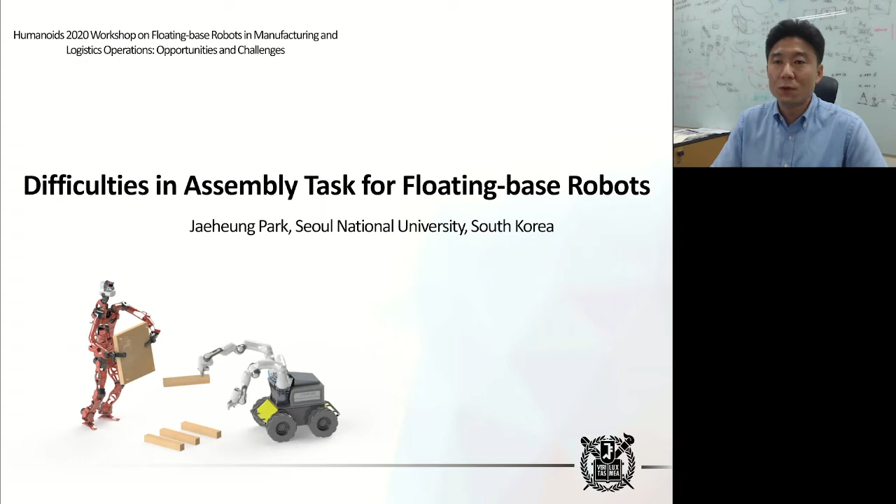So in fact, I don't have direct experience on using these floating-based robots for assembly tasks. However, our group had a very recent project, and in that project we used 3 fixed-based manipulators for assembling a chair. So through the experience of that, I think we can see what would be the difficulties if we do the same thing using a floating-based robot. So I would like to share the experience of our project.

So this is the overview of the project. We are supposed to assemble a chair starting from the instruction in figures. So we have to recognize the instructions in figures and find out the relationships between parts and assembly instructions. And these tasks were conducted by another university, GIST in Korea. And these instructions were given to the robot, and robots are supposed to assemble a chair using these instructions. And this task was conducted by our university, Seoul National University, our group.

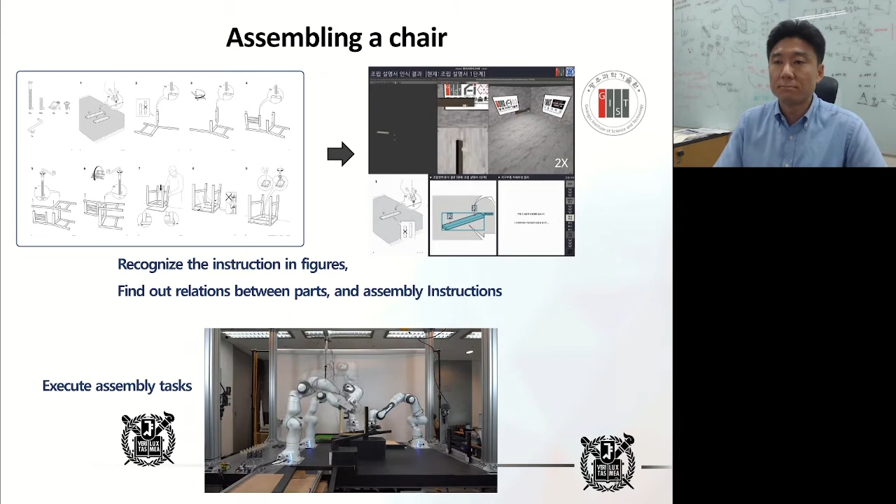And in that project, there were actually 4 consortiums. And I want to introduce some hardware differences among the 4 consortiums because it was quite interesting to see the differences. So the first consortium was Korea University and Surromind, and they decided to use 2 large robots. Those are UR10, and 2 UR10 robots were large enough to manipulate and assemble all the parts. So personally, I think that this is the most efficient way to do that, using a large robot, basically.

Another consortium, Hanyang University and Kitech, decided to use 2 medium-sized robots, UR5. However, those 2 robots were not large enough to manipulate and assemble all the parts. So in the end, they decided to use a moving table and tray so that they can move furniture parts or tools to be used for assembly.

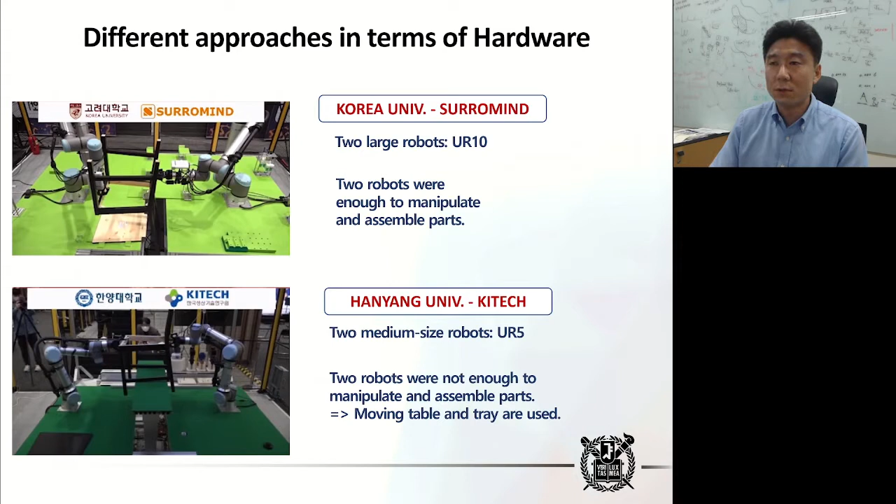Another consortium was Kitech and KETI. These 2 are research institutes in Korea. They decided to use 3 medium-sized robots, RB5, from Rainbow Company. And these robots are actually similar size to UR5. So even if they used 3 robots, they were not enough to manipulate and assemble the parts.

So they designed high degree of freedom robotic hands and a moving table. And all together, they successfully finished the task, assembling a chair. And in fact, they were the fastest among all the consortiums. So I think that using these nice high degree of freedom robotic hands and moving table was a very nice strategy to do that.

Finally, our consortium, Seoul National University and GIST, decided to use 3 medium-sized robots, Franka Panda. The size of these robots was similar to RB5 or UR5. So these robots were not large enough to manipulate and assemble all the parts. The reason that we chose Franka Panda was to utilize the torque control capability.

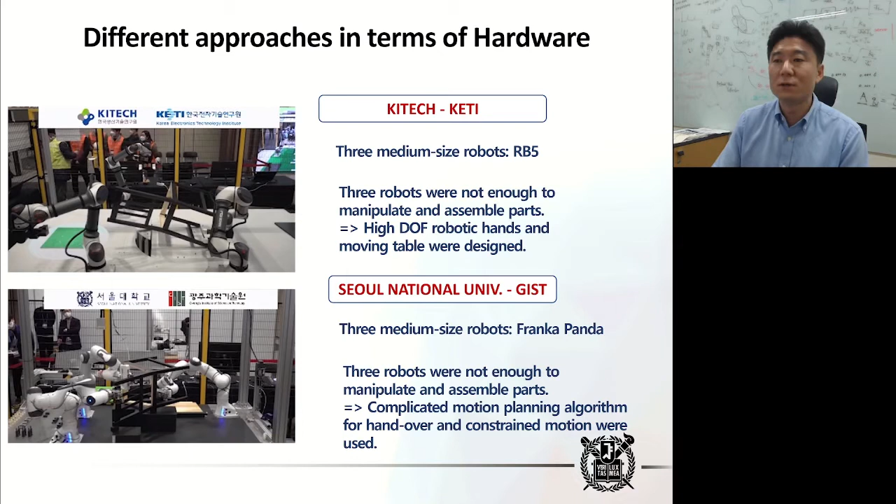And for our case, instead of designing a moving table or high DOF robotic hand, we decided to use only simple grippers. And because of that, we had to use complicated motion planning algorithms for handing over or constrained motion planning. And these actually made it possible to finish all the tasks of assembling a chair.

So our main strategy, the very first one, is the torque-controlled robot and compliant motion control to deal with uncertainties, especially for peg-in-hole tasks. So instead of using a hand-eye camera, we thought that this torque-controlled robot could be used to deal with these uncertainties, and in fact, it was possible to do that. Of course, I think that a hand-eye camera could have been better if we used it together.

Constrained motion planning for multiple robots for a tight but large workspace was another strategy instead of designing a moving table or high DOF robotic hand. And we also designed various tools and simple grippers for grasping and drilling and developed recovery strategies for failure cases.

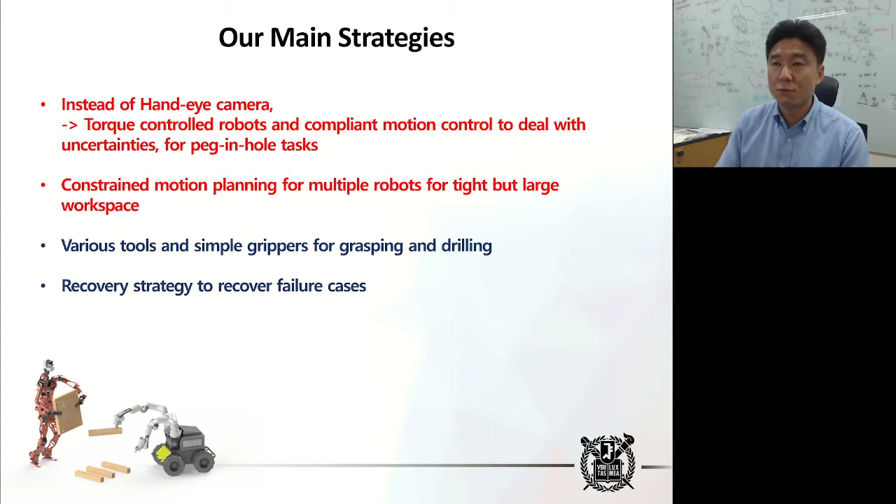However, today in my talk, I would like to focus on the first two strategies because those are relevant to this workshop today. So I would like to introduce our experience mostly through the videos. So this video shows our peg-in-hole strategy with compliant motion control.

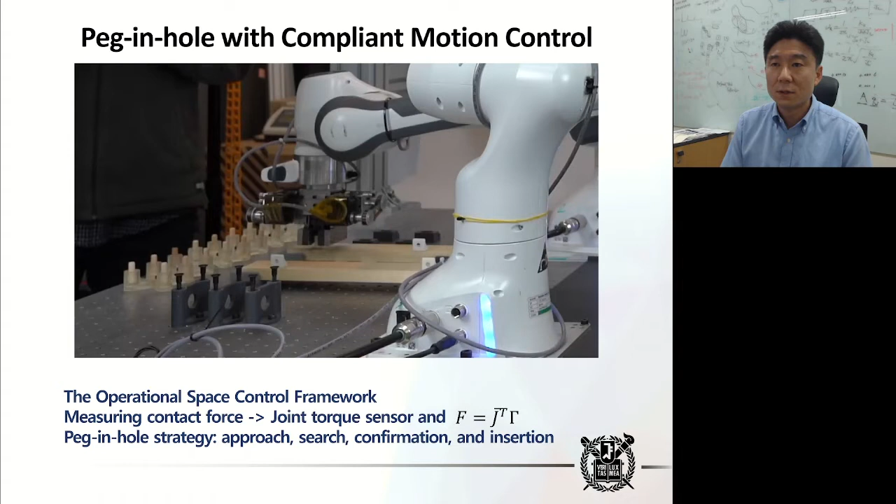You can see that the robot holds an L bracket and then tries to insert it into the hole. Our peg-in-hole strategy usually has 4 steps: approach, like now, then search by spiral motion, then if it is in, we try to have confirmation, and then if it is confirmed, insert.

And right now, we have another step to double check if it is correctly inserted by pushing one more time so that it's really inserted very well. It's finished now. And then the next one was dual pin peg-in-hole.

So the part has 2 pins, and we are trying to approach the other part of the chair. So this is the side part. But before that, we are using a kind of pose calibration using the gripper. So we are touching, holding the side part on one part and the other so that we are aligning the side part as we wanted them to be. And then we are approaching and searching, and confirmation right now, and then insert.

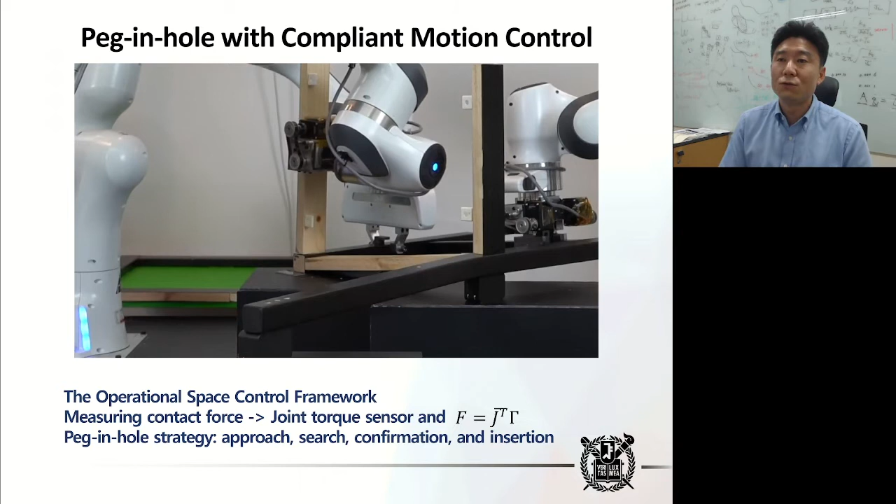So those procedures are basically trying to reduce the uncertainties due to real world cases. Basically, when we hold, grasp, and move the parts, uncertainties come up, and we are trying to reduce them by holding the parts and having the peg-in-hole strategies with compliant motion control.

So now this is a 3-pin peg-in-hole, so it's triple peg-in-hole, but they are grouped into two. So we have here 1 pin assembled and 2 pins are now, we are wiggling to have them inserted very well because it's quite tight. And now the next

peg-in-hole is very interesting and one of the most challenging tasks in our project. So now you can see that the side part of the chair is going to be assembled, and here you can see so many pins. I think there are 7 pins, but they are grouped into 4. 1, 2, 3, 4 groups. Now we are trying to assemble one by one,

and here you can see the 2 pins are searched to be here in two holes. So we try to do only one part here first, and then try to assemble all these three together later.

And when we do this peg-in-hole strategy, we many times have to understand if the robot is in contact or not, and what the contact states are right now. When we do that, we mostly use the joint position information and forward kinematics. However, many times we also use the joint torque sensor.

Because the Panda robot has a joint torque sensor on each joint, we use the formula force is equal to J bar transpose gamma to compute the end effector force, and those forces were used to understand what forces are applied on the end effector.

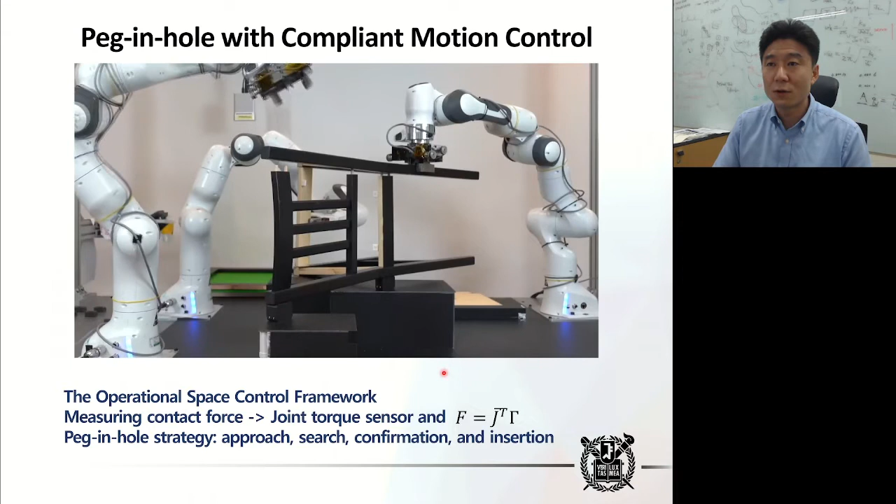And now you can see that the robot is trying to hold the parts of the furniture that are going to be used for peg-in-hole. Basically, now we have 1, 2, 3, 4, 5 parts, but since these are assembled, right now what we are trying to assemble is basically this part with the side part of the chair, and this part and this part.

So we want to hold this side part, and this is the back part, and this part with three robots. So three parts, three robots, and then try to move around to align the pins with the holes. And during these operations, we have to hand over this part from this gripper to the other gripper.

And now this is going to hold to assemble this part. By the way, when we move these robots from one place to the other, we are planning in joint space and controlling in joint space. And when we do the peg-in-hole task, we are controlling in the task space.

So now you can see that we are aligning all these three grouped pins all together and successfully inserted. Whenever we finish this successfully, we are very happy. Although we were not successful 100%, the success rate was quite high.

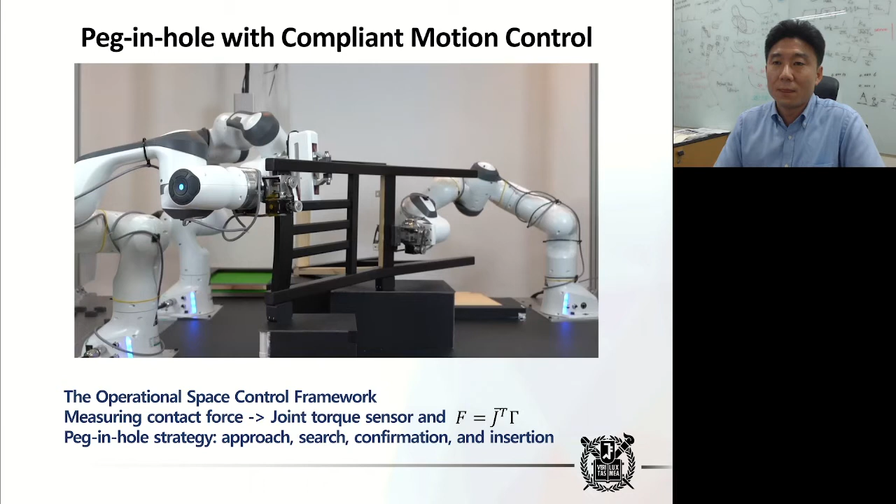Calibration of multiple robots for this assembling task was an unexpected problem, actually. So basically, the robot has redundancy because it has 7 DOF on each arm.

And because of the redundancy, we have this property. For a given goal end effector position, we may have two joint configurations. But why is this the problem? So as I mentioned before, we are planning robot motion in joint space many times when we move one part from one position to the other. And we are actually conducting this motion planning online.

So at this moment, we plan from one place to the other, and we have a solution of Q1. And next time, we may have the same motion planning, but we are going to get Q2. However, when we execute it, we have different position X. Forward kinematics shows the same X, but actual robot position was different when we measured with rulers, basically. So this posed a very serious problem. So that's why we had to do calibration.

But it was quite difficult to do it for a redundant manipulator. And also, the bigger problem was dealing with multiple robots because they have shared workspace. So we have to focus on this workspace to calibrate all three manipulators together. So what we decided to do was design one metal part, and all three manipulators are connected together here, and we know the geometry of this object exactly. And this shape and size was designed to be similar to the shared workspace of the robot, roughly, although it's not exact.

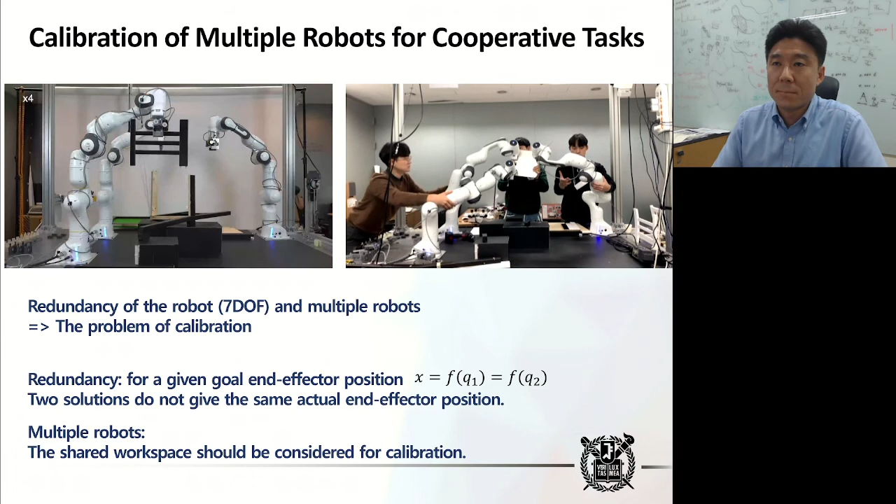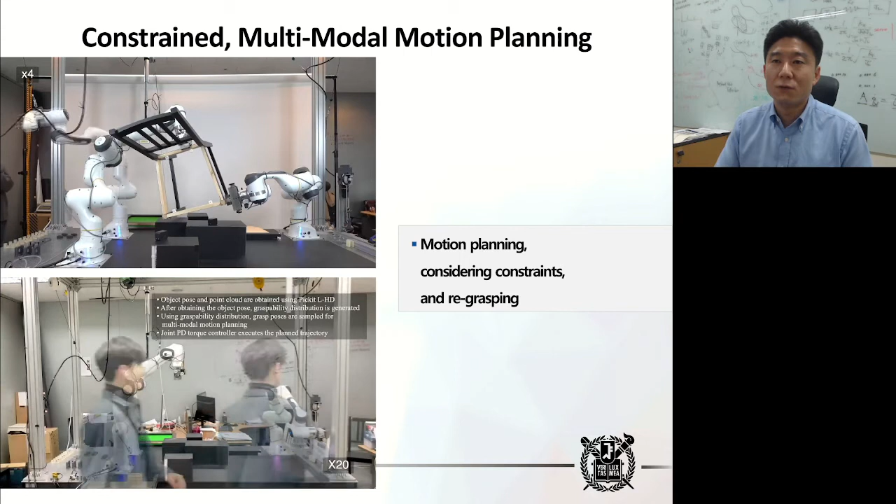And another feature that we had was constrained and multimodal motion planning. This is because we didn't have a moving table, a moving tray, or a high-DOF robotic hand. So that's why we used the simple gripper to move the partially assembled chair using three robots in this case, and we had to rotate it to assemble the other parts of the chair. And during that time, we had to hand over and regrasp it in the air. So it was very, very difficult to plan. It was quite difficult to obtain a solution many times.

And in the lower video, you can see that sometimes we had to move one part to a location which cannot be reached by one manipulator. Then we had to hand over, and that involves regrasping. So whenever it involved regrasping, the motion planning was quite difficult, and also the uncertainty increases. So these were our strategies to do that.

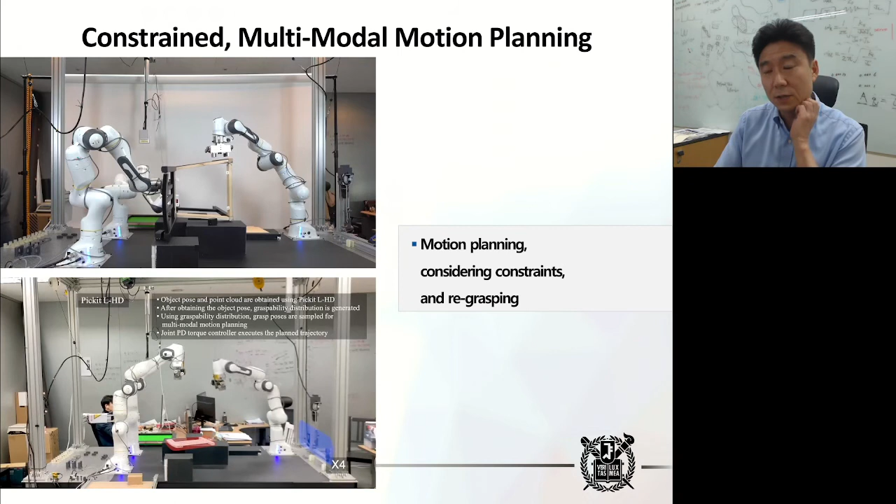So in summary, for this project, we used only fixed-base robots. And to deal with the uncertainties, compliant motion control was implemented using torque-controlled robots, instead of using a hand-eye camera. And of course, a hand-eye camera could have been very useful, but the compliant motion control strategy alone was enough to finish this successfully. And among many difficulties, calibration and motion planning were quite critical and quite difficult in our case.

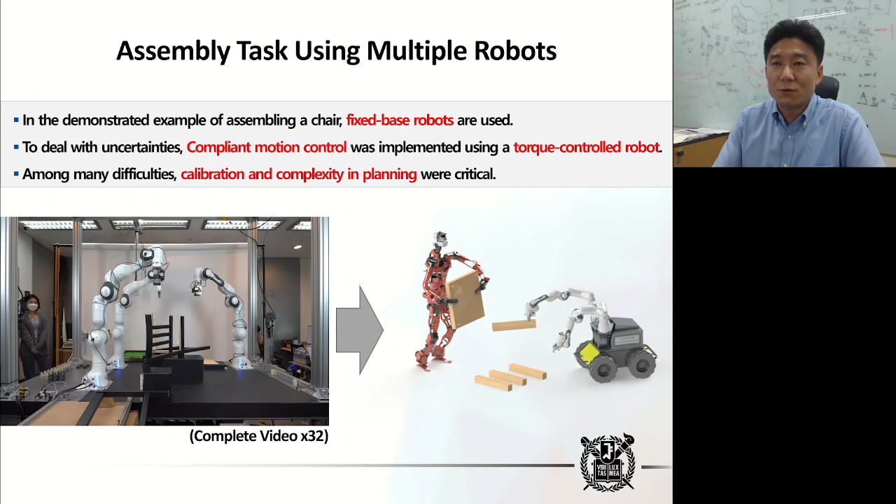Now, from our experience in this project, if we want to move this same task to floating-base robots, then what would be the difficulties and what would be the advantages? This is the discussion in our workshop today. So I think the obvious advantage of using floating-base robots would be a much larger workspace, especially for moving parts. And because of that, we will be able to use a smaller number of robots, and each robot would have more redundancy, so that would be very nice for conducting tasks. And it will require less regrasping, which will reduce the uncertainties.

However, there would be many difficulties using floating-base robots. So one thing would be much increased uncertainties because of the floating base. So compliant motion technology should be utilized. However, that would probably not be enough. Then we have to use SLAM algorithms with external sensors to reduce the uncertainties, and visual servoing with a hand-eye camera is probably going to be needed.

And calibration would also be much more challenging because we are going to deal with much higher-DOF robots with a larger workspace, and floating-base robots can pose many more problems for that. And motion planning would also be more challenging because we have to deal with high-DOF robots and much more modeling uncertainty. So I think we will have these advantages and difficulties.